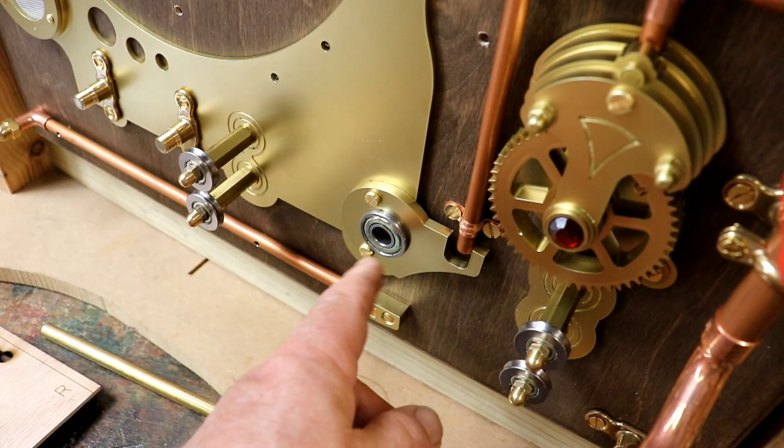Let's talk bearings, main bearings. It's a very big bearing there. I've got this screwed together, and also if you look at that, this front piece, I love working with bearings. This front piece is the bearing support. It just holds that in place. It's not going to fall forward because it's quite a tight fit. But also the nice thing about bearings is when this gear is on, that will stop that from falling out if it wanted to. This also hides the little bits of wire from the reed switch there.

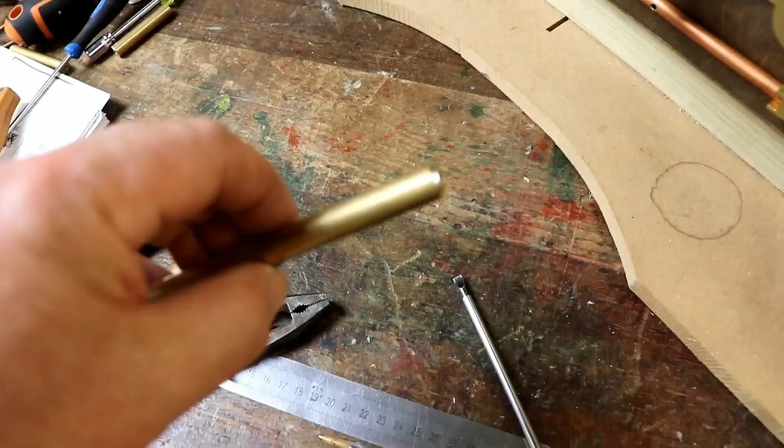Then around the back, there's that bit. There are the three pieces of plastic, 10mm, 10mm and 5, and again the 5's acting as the support to hold the second, the smaller bearing in. Then what we do is get it lined up, and to assist in that I've got a leftover bit of this 10mm brass which I've tapped. And again, it's little things that you learn all the time. I'd forgotten that the little bearing at the back would rub on something 10mm wide, so rather than having a washer, I just turned a little bit down like that and it just spun beautifully. I didn't notice until I tried setting this up and realised. So I'm going to do that with the shorter bits.

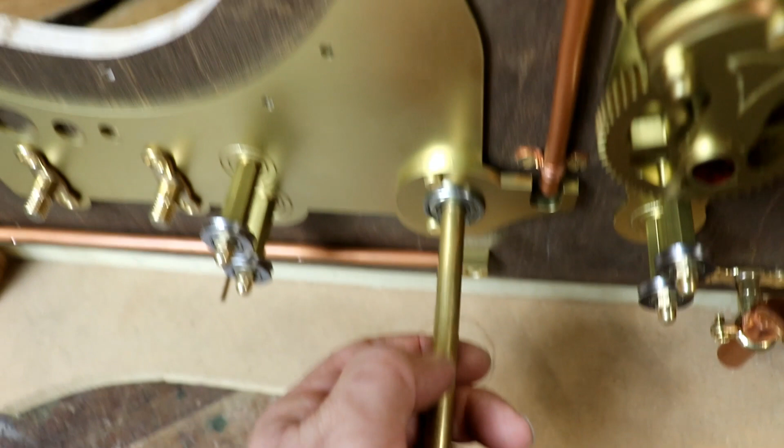So that is going to go in there. I'll screw the back on, and then I'll cut this bit of wood out with a notch. I know that's at right angle, so then I can sit that on there and get this lined up and then do the same vertically, because of course there's a little bit of give and take in all these screws and bolts, so this can be set in the right place. Let's get on and do that.

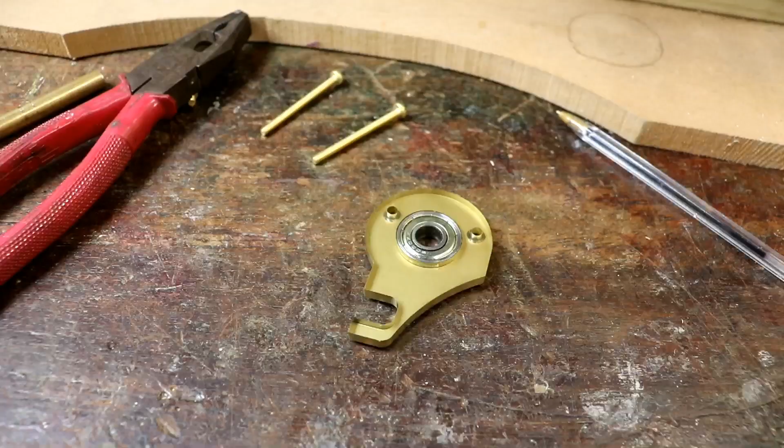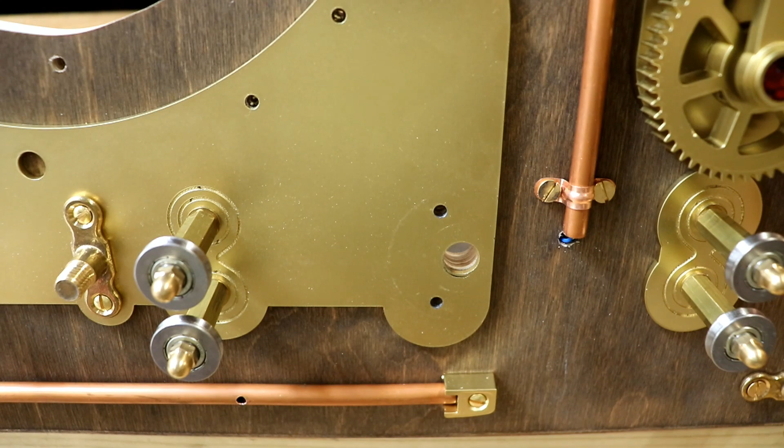Right, there's the back screw just screwed into the end, and of course that holds the back bearing in place. Lovely. What a voyage of discovery this is turning out to be. So I've just noticed that once this is clamped down, the clearance hole here is 12mm diameter. That isn't big enough to miss this centre part which rotates, so it's actually grinding round on here. Right, now this is an interesting problem, because I think 15mm diameter will be a clearance. Drilling that out to 15mm without taking everything off is going to be interesting without destroying everything.

I'll have a think. Yet another sort of drill bit, you say, or cutter. This is nice because it's for sheet material and it just has 1mm increments all the way up. So 15mm would be fine. And I was thinking, well, I could put this on the laser cutter and just get a bit bigger, but it's such a little difference. I'm going to try this, fingers crossed. In fact, I'll video the chaos that will ensue.

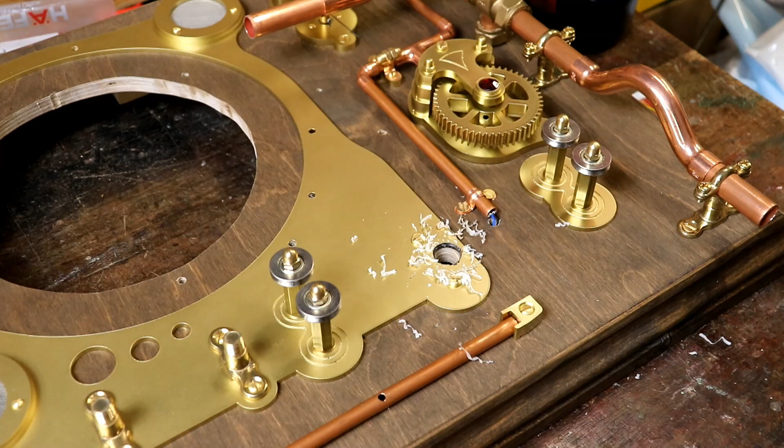Right, well, I've screwed that down in the hope that it doesn't flap around. What I'll also do, as I said before, the paint does tarnish if your hands get on it too much, so I will put a cotton glove on. I'll slow that down. Let's see. Oh. So far, so something else. Oh, there's a little bit of chippage there, but let's see. Well, that's 15. I'll go a little bit further, a famous little bit further.

That's it. Obviously, it doesn't matter about the wood. Right, I'm very pleased with that. Just a little bit of housework. Fantastic. Now, when that sits on there, that's not going to bear down on that. That's free to turn. Lovely. That's better. Perfect. The centre of the bearing is now turning properly. Even though this brass rod seems to be slightly bent, I rolled it down a piece of plate glass and couldn't detect anything, so it's my eyes. Now I'm happy with that, and that's now set perpendicular. I will go and do that on the second one.

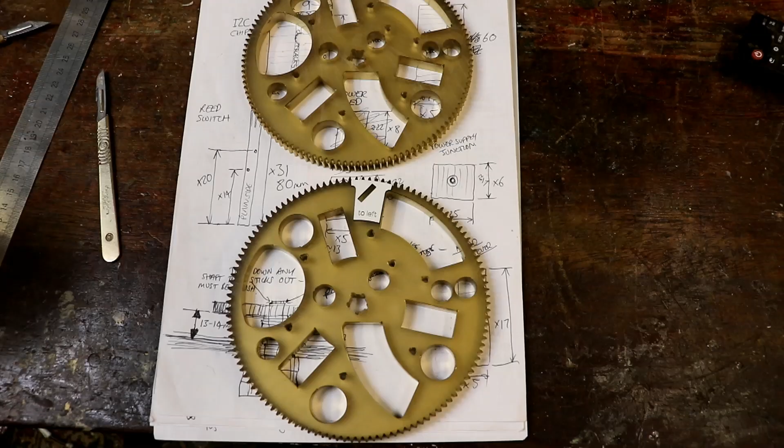Talk about cryptic clues. Trying to work out, and I didn't make a note of this. This is the magnet holder, just a support. It says cryptically to left. I know it goes on the back of this because I've had a look with the first one. I was trying to work out how on earth you know where it goes, but it'll only fit in one place, which is there. How fabulous.

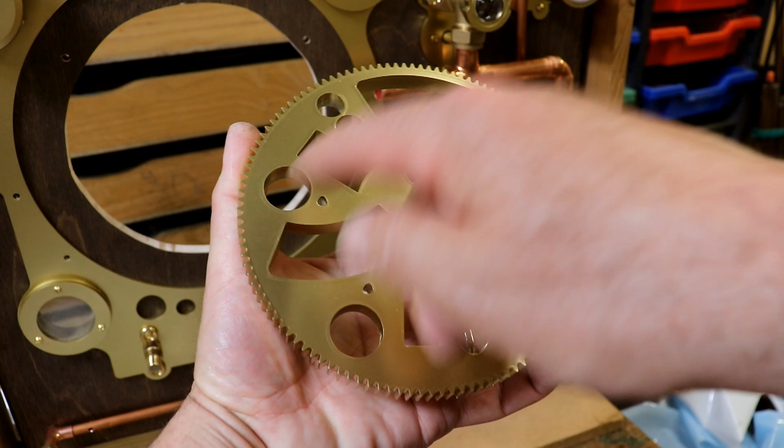The reason for that sort of strange angle is that as it rotates around, it will line up vertically with the reed switch that's in there to a particular point. Now don't ask me the relationship between the engraved dial and this, I don't know, but there's one of 5 places it can go in because there's one of 5 screw holes. So, oh no, how fabulous!

Even though I say so myself, of course. There's this one that works the crank or cam or whatever it is, crank pin. That's brilliant. So it only fits one way around. Oh joy unbounded. Right, I'll get them glued on and then try and find a couple of magnets and get them glued in. Then we can spin them around by hand and see whether the reed switch works.

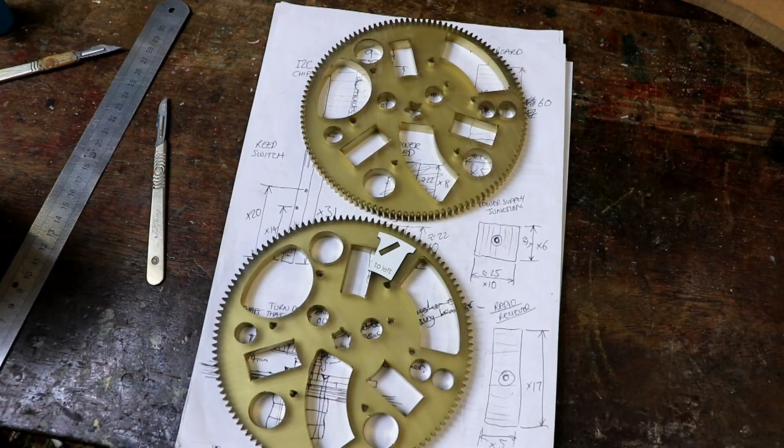This is so exciting. This sort of stuck out too far, so I put a washer and an M4 screw and just pulled that in, perfectly flush now, lovely. The reed switch doesn't hit this, it just goes past it. The gear here was too far forward, it was about 3mm, 4mm different, which obviously isn't right. But of course I hadn't glued it on, I loosened the 2 grub screws, eased it back, tightened them again. What a joy, absolutely fantastic.

So I'm going to glue this on through those little holes and then twist this very gently. I don't want to damage this motor. Might even get an Arduino and just quickly rig one up, perhaps wire. Yeah, I'll see how it goes, just to check that the reed switch is working. And of course I forgot to say, the other wonderful adjustment is this, so I can just slide that until they're really too tight, just get them the right distance, just tighten 1 screw or 2 screws and that's it. What a joy.

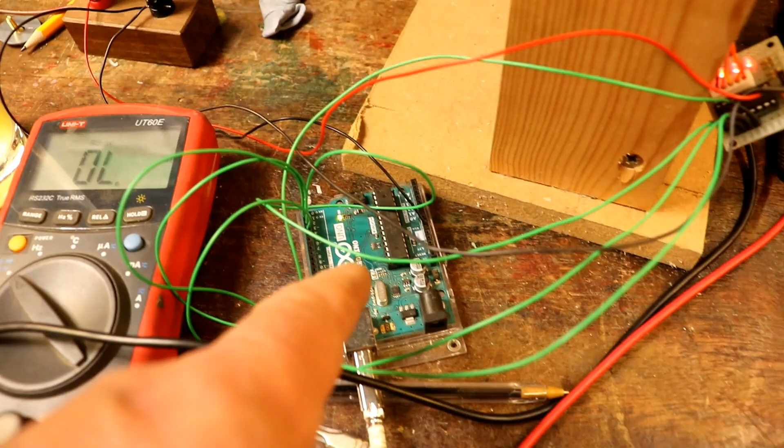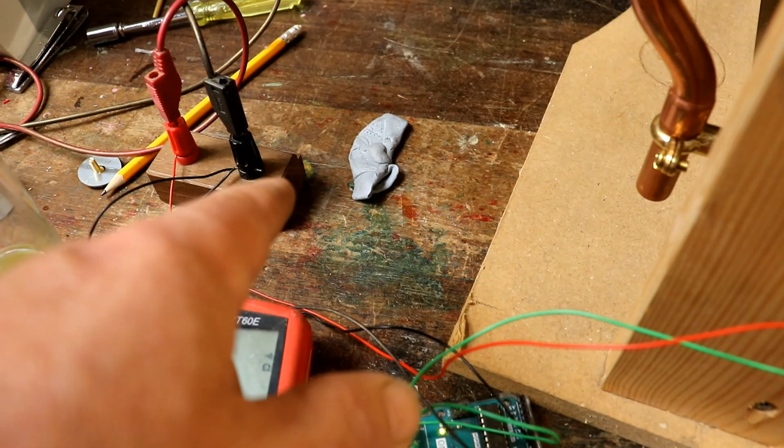Right, got a nice simple sketch set up. Oh, that bleeping is good. I've got an Arduino Uno connected to the 5V USB power supply of this, and because it's running, it's also connected to this little interface. The motor draws far too much for the power supply on the Arduino, so I've got the grounds, 0V, commoned up, connected together, and a separate 5V supply running straight to the interface.

So, and that double bleep is really good. For some reason the multimeter does double bleep when it is set into that mode, but that's great because that means that the magnet and everything else is all lining up properly. So the first time that anything is moved on this machine. Let's just go again. Fabulous, great. I'll get on and do the other one.

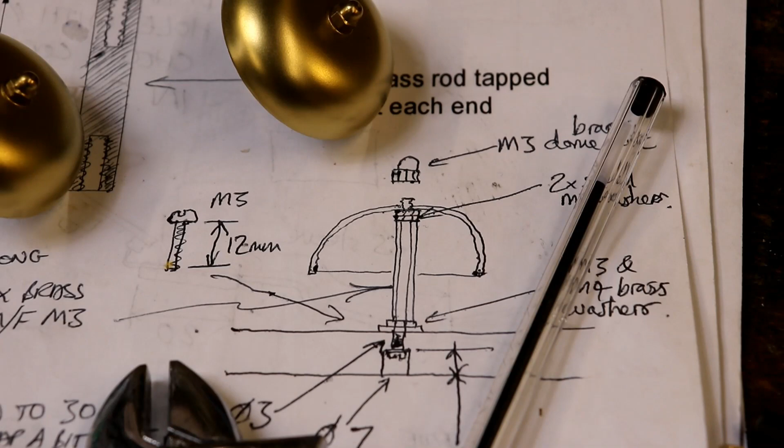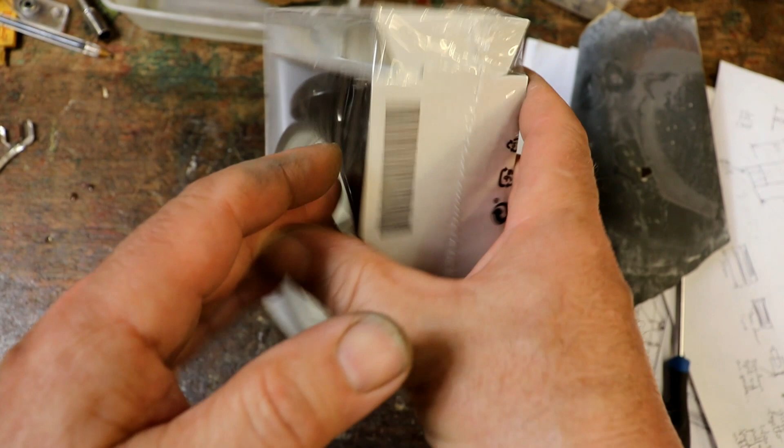Bells, you say? Yes, bells. Well, 1 bell for each one. These ones I got off one of the IKEA alarm clocks, which was the cheapest way that I could find to get them. Sanded them down, sprayed them up. I know you've seen all that because it's probably a couple of minutes ago on this video, but there's another day here. Now to mount them, originally I'd come up with another piece of brass that needed to be turned.

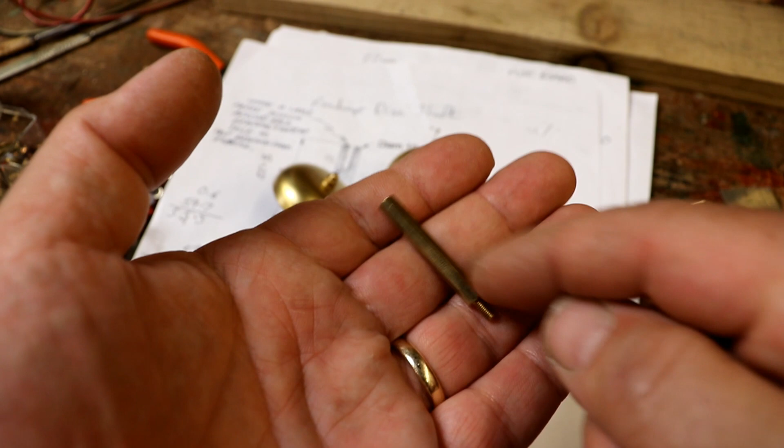That was before, for some other machines, I discovered or started using these hex spacers, which are brilliant. They're brass, you can get them in all different lengths. You can get male, female, or this is in effect male, female. So you could actually screw a load of them together if you wanted. As I say, this is M3, you can get M4 ones. I've just got 2 sizes. This is the M4 type, which I use for something different. Hold on. Yeah, so with a little bit of fiddling, cutting it down to the right size, I'm going to use these to support the bells, which is great.

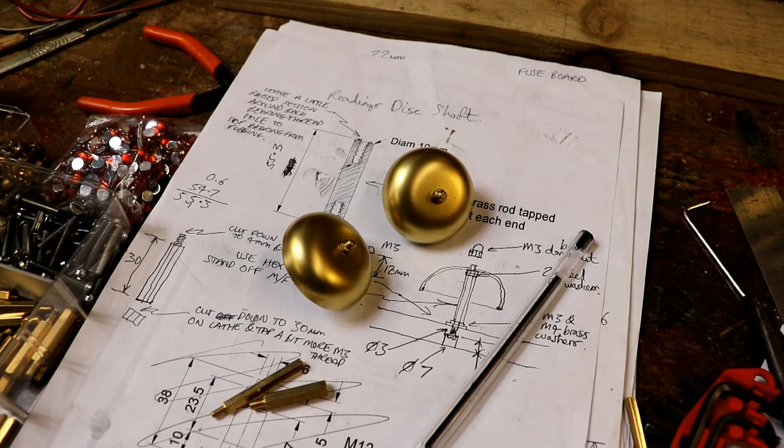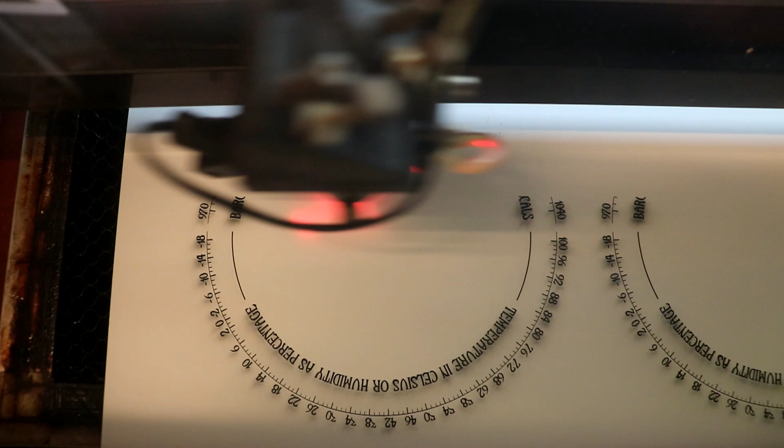And in the background you can probably hear the poor old laser grinding away. And that is engraving, raster engraving, because the figures are so small and tight that it really wasn't worth doing with line engraving. So this is raster engraving, and this has so far been 37 minutes. Hence the fact in the past I said it's so slow, but the quality is absolutely amazing. So that's going backwards and forwards.

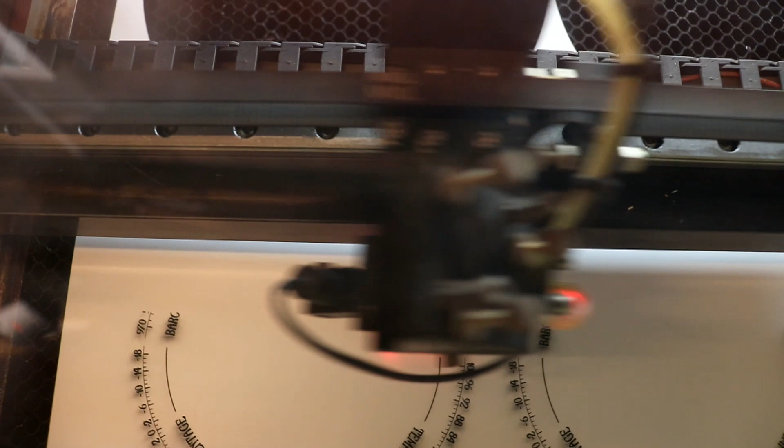I'm doing it over this side of the machine, not up here where the datum point is, simply because with the repeated backwards and forwards motion, imagine this drive belt going backwards and forwards, stopping and starting. I know it's got slight acceleration, deceleration, but I think it's just a good idea to use a different part of the drive belt for this, just moving it around the platen a bit. That's exciting to get this done, because that means I can then get the reading gear completely finished.

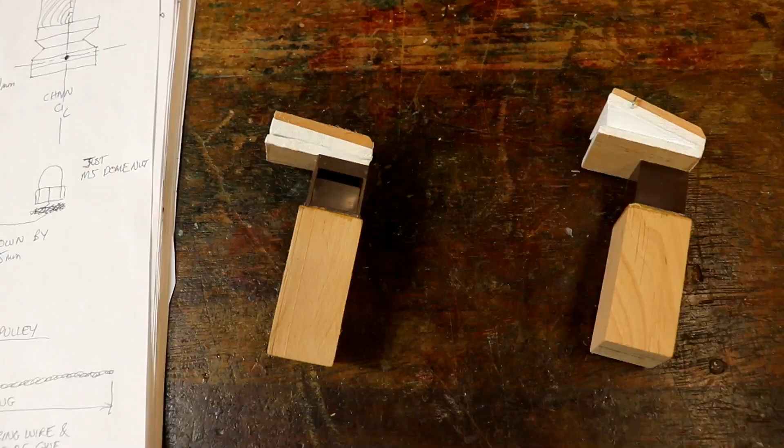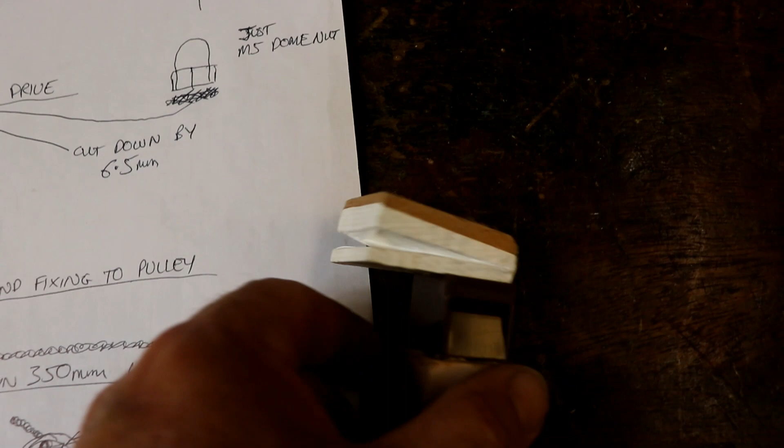I'm going to do the cuckoos now, because lots of that's sprayed up silver and I want to give it time to set. I've got lovely drawings. Lovely. That's the bellows, which I need to adapt. And oh, that's the drive spindle and the chain, which I've just found I've got. Lovely fine chain and a pulley. First thing to do is to take it to pieces. Now, from my experience, this bit, the actual flute, is the same on all sorts of different makes of cuckoo sounders.

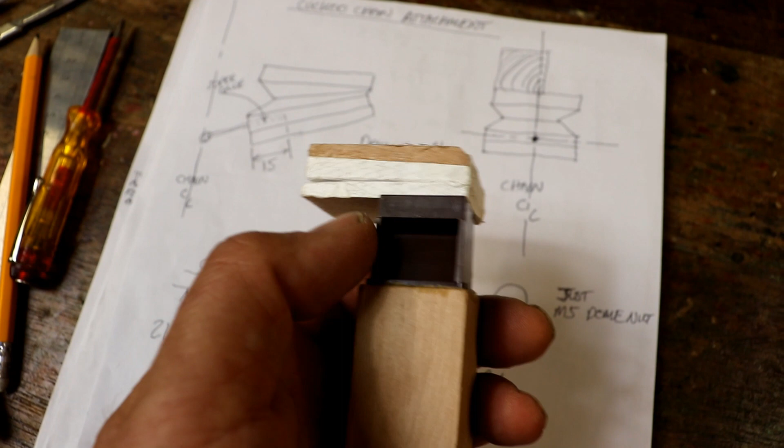The first thing I'm going to do is to cut it off. I'm going to slice this off on the bandsaw without damaging that, and I can't remember how I cut this off, because I want the bellows and I want that. I want everything. So I think I'm going to use a scalpel to just try and gently break the glue that they used to stick it on with. I'll get on with that and show you the results.

By the way, to cut this off, the bellows from the sounder, something like a strong Stanley knife is the best way, because obviously you don't want to damage this bit or that bit. And I've cut it off, it's a sticky glue, the rubbery glue they use, so I'm just going to sand that very lightly on the sanding machine, both the bits. Got them apart. Now I need a way to connect this to that. And there's a story behind that.

Originally I used the motor to actually pump the bellows, so the other way up, it was upside down in effect, and that worked perfectly. But then I had a problem with one of the motors that, even with pulse width modulation, so controlling its speed, wouldn't lift the bellows up, close the bellows efficiently. It would do it too quickly or not at all, even fiddling around.

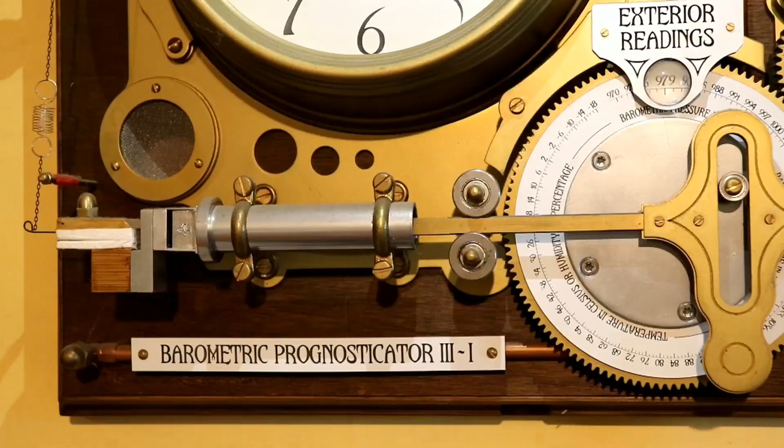So then I ended up realising it had to be gravity fed, which is absolutely fine, but it meant turning the bellows the other way up, and then they got in the way of the air vent and it didn't look very nice. So I came up with this very complicated tube that carried the air down from the bellows into this with the bellows the right way up, to cut a long story short.

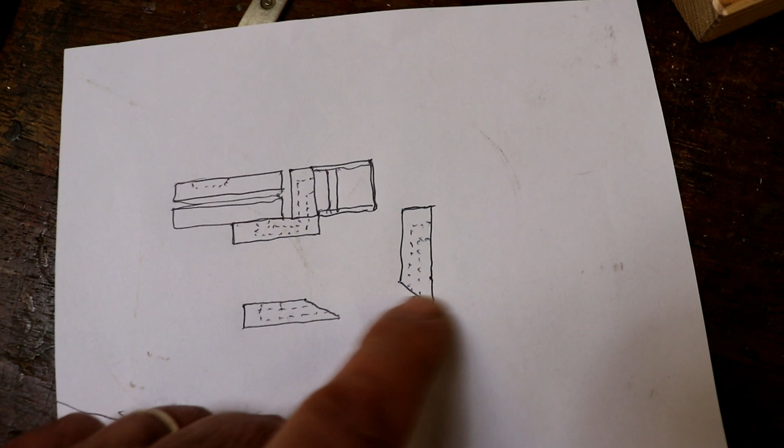This time, however, to try and simplify it, I'm going to try and make it from two pieces of 10mm acrylic that's laser cut with a V on the end, a mitre joint. The reason for that being, I can then drill a hole in the back here and up to it, and a hole in the back there and up to that, and then glue them together and not have ends of holes, because if they're rectangular I'm going to end up with an end of a hole I need to fill up. So let's get on and cut the bits out.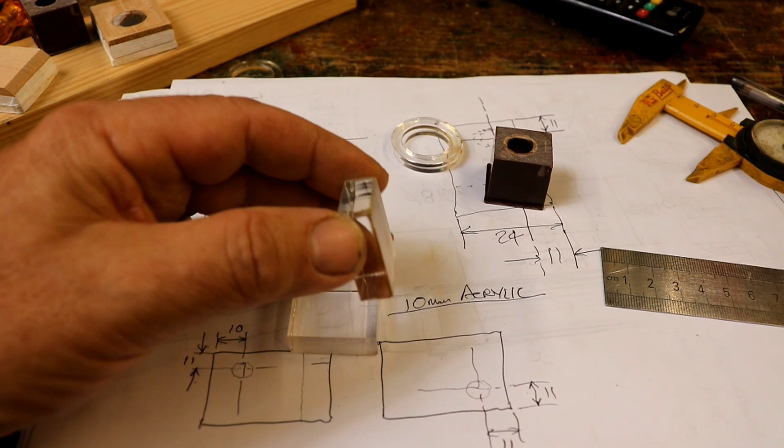So here's the plan, Stan. There's one bit, and you can see I've just marked out lightly where to drill the hole, and there's the other bit. I'm going to drill the holes and then mitre them and then glue them together. Give that a go. Right, I've drilled the little horizontal hole there, you can see. Now I'm going to try and drill the vertical one. I've got a mark here so I can line it up that way, and I'll use my eye to line it up that way. It's all very precise, this stuff.

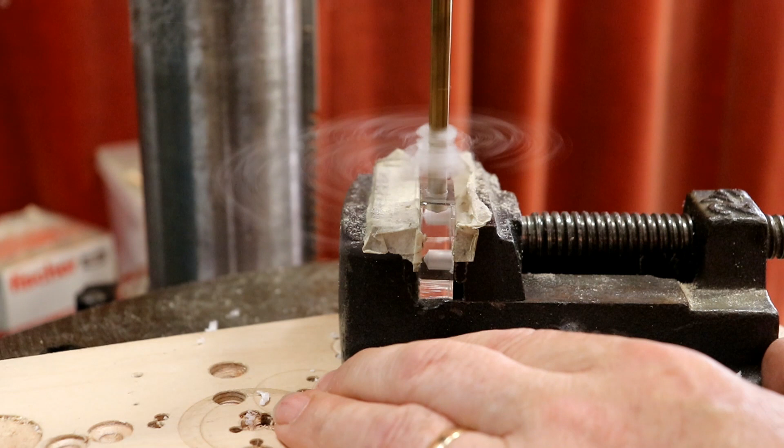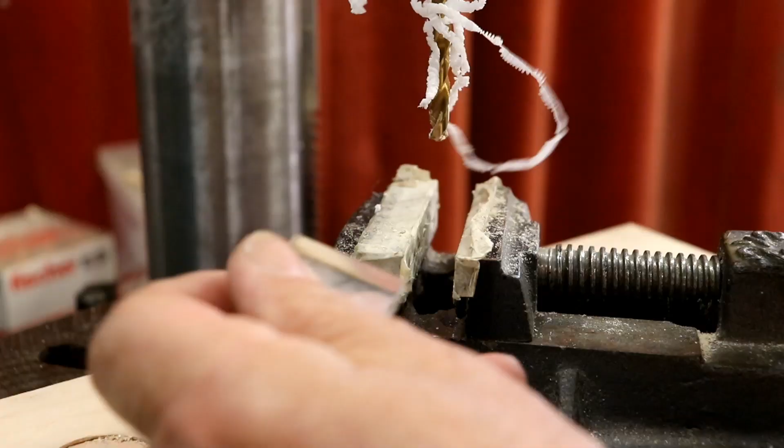Then, and I've clamped it in a clamp from my many previous adventures where bits of plastic end up as projectiles. I think I might hold this a little bit firmer. Voila! The holes have joined up. Right, so you can see now that's linked up beautifully. I'm not going to win any prizes. Now if I sand a mitre on these two bits, I'll be able to glue them together and no air should escape, I think, although I may be wrong. Anyway, I'll give it a go.

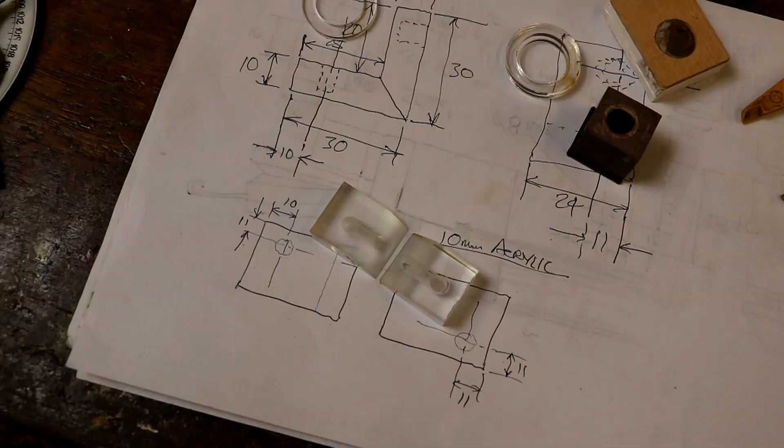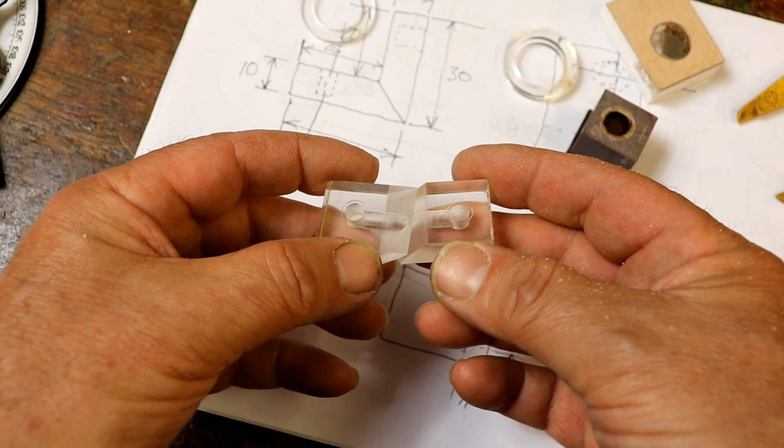Well, in principle it works beautifully. Fits together and the pipe will be sealed. The only thing is, of course, I've done this the wrong way round, so it'll fit perfectly like that, but this needs to be that way. Fat chance. Interesting. But I need to make two of them, so if I do the other one, I'll probably have to do it again. Never mind, the principle works.

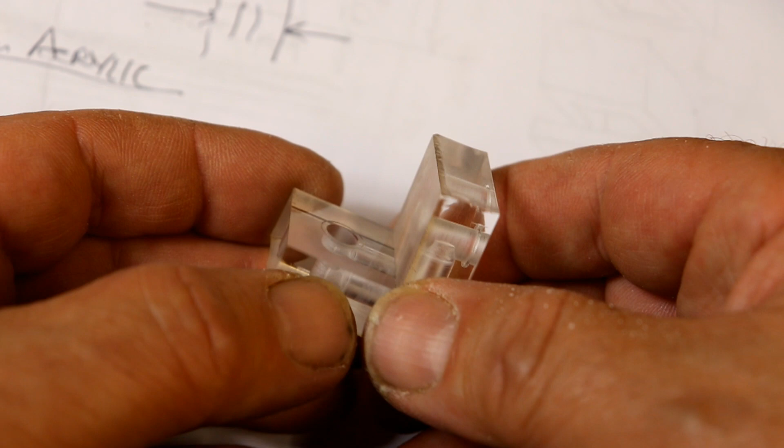What an idiot. Just before I went ahead and did it, I thought, hold on a minute, could be a type of puzzle, and it was a really difficult one with the angle of the dangles. So that goes that way up and this goes this way up. And then if I lay that down and get my fingers out of the way, ooh, you can see what I'm talking about. That's worked out really nicely.

Glue that together with super glue, and then this flute will go here. This bellows with its hole there, oops, will go here. So in effect that's going to stick on there. Now is that going to work? I don't know. I think I need to cogitate further.